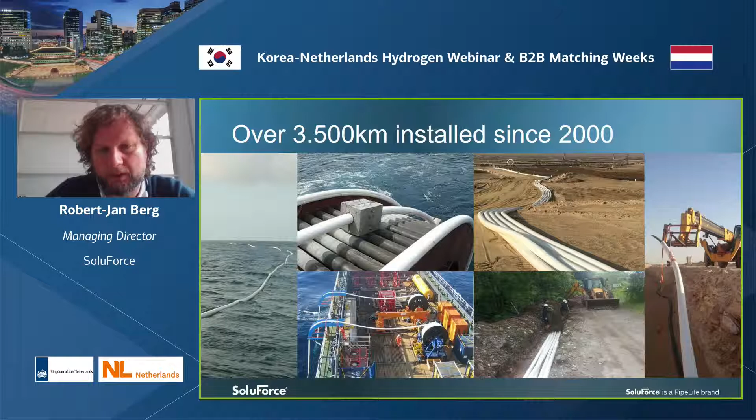What is the general idea behind it? Our product is extremely easy to install, and we can come in various locations others will not be able to reach. Then I want to bring you to the hydrogen specific applications of Soluforce. So next slide. So what did we do for hydrogen?

Just shy of 2 years ago, one of the ports in the Netherlands, Groningen Seaports, approached us with a request if we could develop for them a specific hydrogen pipeline. They had the intention to install the first backbone of hydrogen in the Netherlands, and they wanted to have a fully non-metallic product for that. So what we did, together with one of the independent third-party institutes in the Netherlands, which is called Kiwa, we did extensive testing on our pipe.

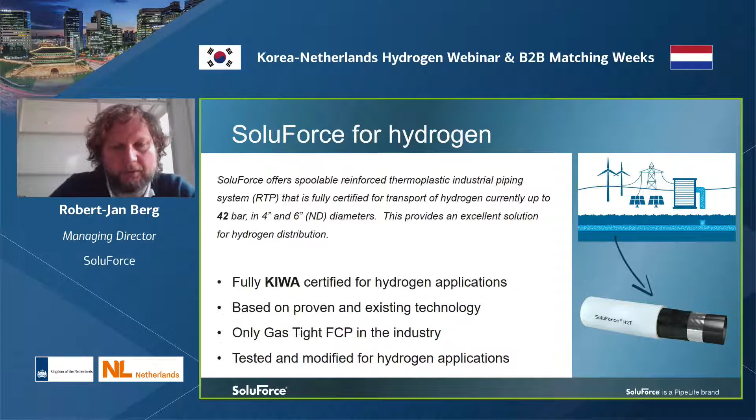It was testing of about 14 months, where we tested the permeability of our pipe, but also the compatibility of all the components of our pipe against hydrogen, which ultimately concluded after 14 months of testing that we've got a product which is unique in the world, if I may say, and that is fully tested and modified for hydrogen applications up to 100% hydrogen transport. Next slide, please.

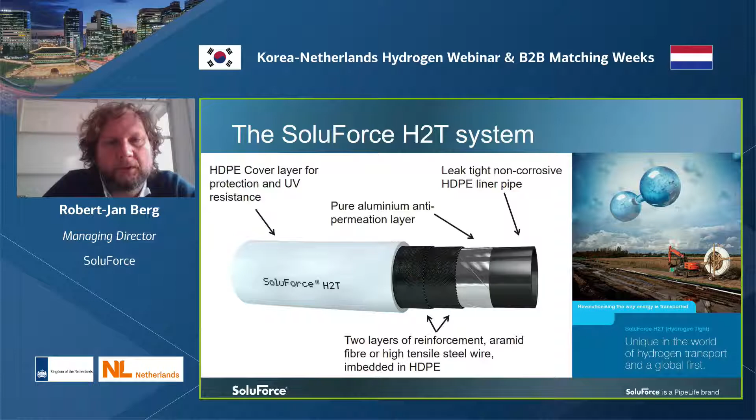How does this pipe look? The pipe consists of a leak-tight, non-corrosive PE inner liner. Then it has got an aluminium anti-permeation layer. Then it has got a 2-layer reinforcement, that is aramid reinforcement, that is being protected by our white cover of PE, which, in case you put it on the surface, has got UV resistance and makes sure that your pipe will remain at ambient temperature. Next slide, please.

Again, what are the benefits and the key elements of our pipe, the way we also want to emphasize for the hydrogen world? Our product is coming on coils of 400 meter. They are easy to transport, not only internationally, but also locally. You can see in one of the pictures, you can just use an excavator, have a very easy trailer behind it, and you can start installing our pipe. That makes it very easy and accessible to install our product everywhere.

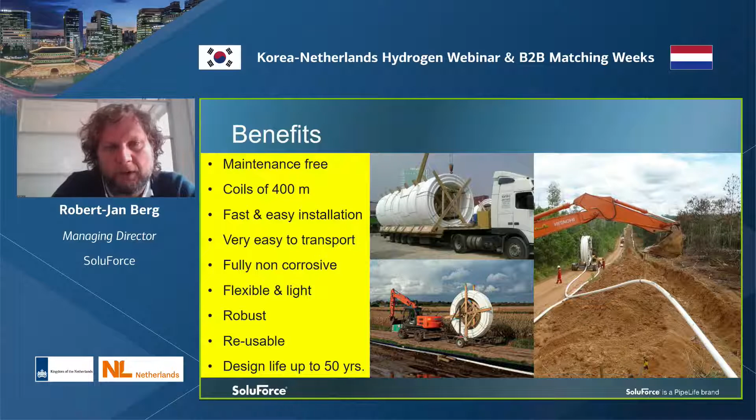What I do like to say is we are there. We have a product that can easily and readily transport hydrogen up to 100% hydrogen mix at the moment. We're looking forward to bringing our technology to every part of the world, also to Korea. And what we're looking for is, one, projects in Korea that have a request for hydrogen transport, but we also look for partners to develop our product further or potential agents to help us steer and understand the market in Korea. That was my presentation, and I thank you for listening, and 감사합니다.

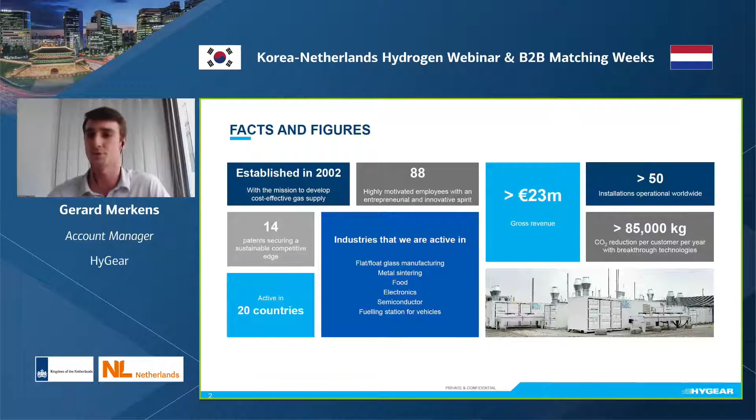Next slide, please. So what are the technologies that we have? The HyGen is our core technology. That's the steam methane reformer, which is built in a 20 or 40 foot container, which is able to produce hydrogen gas from natural gas. Apart from that, we also have the HyGen E, which is an alkaline electrolyzer, also comes in a 40 foot container.

And specifically for the glass and in the metal industry, we have developed the HyREC, which is a recovery technology that is able to capture the spent gases that they use in their process, purify them up to the required standards, and then feed it back into the process. And for other applications, we have also the HyPure, which is able to purify hydrogen gas up to higher purities.

Next slide, please. So what is our distinct advantage? In the traditional supply method, you see that you have a centralized production location for the hydrogen gas, and then the gas is compressed into trailers and transported via road transportation. And one of the benefits that you have with on-site generation is that you minimize the amount of truck movements. The systems are completely autonomous, so you also have less risk due to human interaction. And because you minimize the amount of truck movements, you also have a reduction in CO2 emissions.

Apart from that, we do, however, own our own truck operated fleet. That is so we can secure 100% supply reliability to our customers. So let's say if you have a generator on your own site, we would also include a tube trailer supply to really secure that 100% supply. Next slide, please.

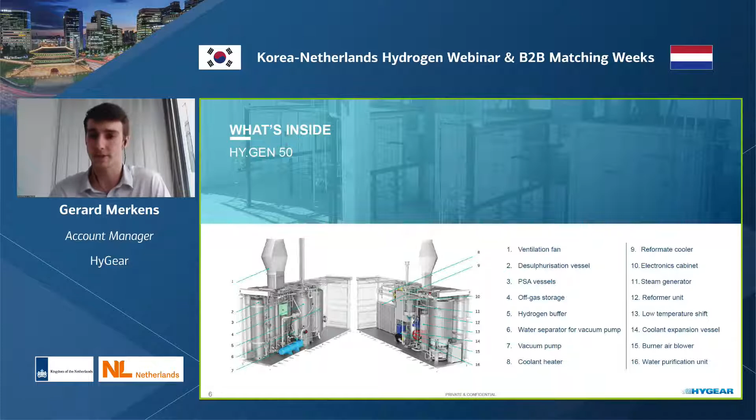Additional equipment to compress and store the gas is not included in the system, so that will be outside of the container. But everything regarding the production and purification is included. Next slide, please. And we have three models available. So the HyGen 50, able to produce 50 or 47 normal cubes an hour. That is roughly 100 kilograms a day. The HyGen 100, which is roughly 94 normal cubes an hour, able to produce 200 kilograms a day. And the HyGen 150, which is able to produce roughly 300 kilograms per day.

And nowadays, we indeed see the increased demand for fueling stations. So it's ideal to have one or two systems. You can combine them. You can install them in cascade to secure that supply for the fueling stations. One main advantage of these small-scale on-site generators is the flexibility. Whereas normally you cannot scale down the systems too much because it will cause wear and tear and stress on your materials, on your metals inside the system, our system can really scale down to 10% of its maximum output.

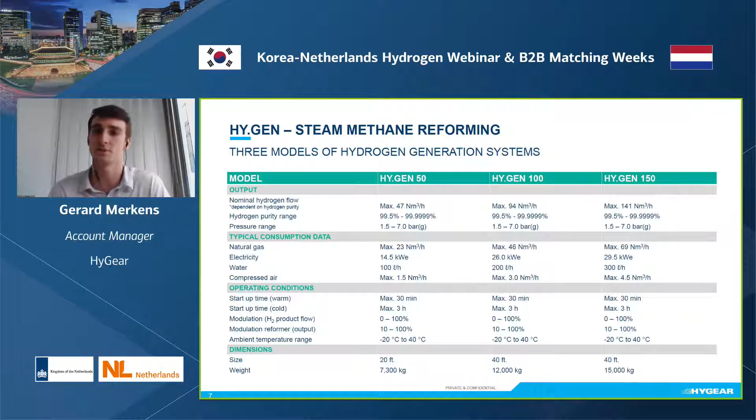So for example, for fueling stations, of course, you don't have a constant flow or a constant demand. So the system can actually read what the demand is and scale its production to the requirements. Next slide, please. So as mentioned, we have our first reference in South Korea. There, the hydrogen gas that is produced will be used for the stationary power generation, but also for fuel cell vehicles.

Next slide, please. So I'll just go through some of the references. If the time is up, please, we'll go to the next speaker.

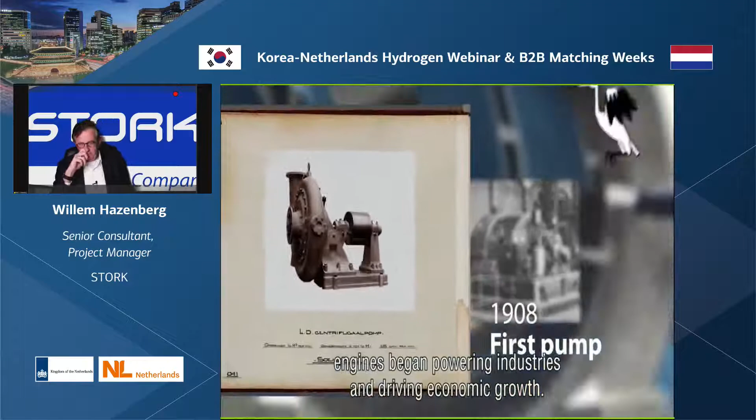Stork's products received top recognition. We won gold for our horizontal compound steam engine at the 1878 World Expo in Paris. And we were certainly in good company. Along with product innovations came social innovation. Stork cared about the well-being of its people, recognizing that they were key to success and believed in sharing prosperity.

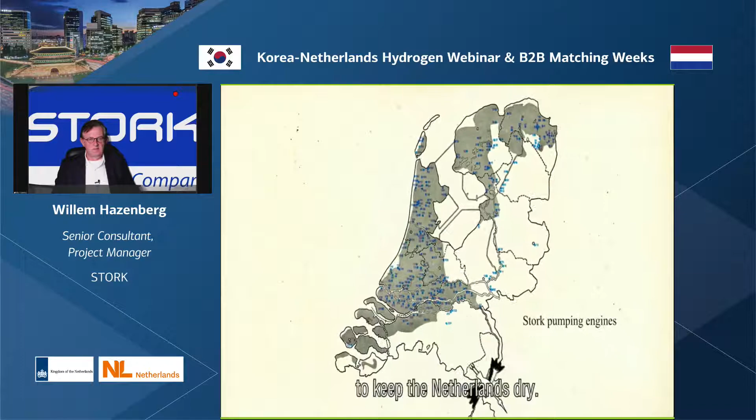As our products spread throughout the world, our company also grew, spreading its wings to the Far East and the Far West. Stork colleagues began traveling widely to support their products. The products of Stork directly impacted countries and communities. By the 1950s, more than 200 pumping stations were powered by Stork engines and pumps to keep the Netherlands dry. Some are still in use today. The world's most powerful diesel marine engines were built by us in 1975.

After years of engineering and collaborating with industry peers, as we continued to grow and diversify, we acquired companies with specialty expertise, merged with others, and took on joint projects. In 2007, with a workforce of more than 8,000, we shifted our focus to industrial maintenance services, while keeping select fabrication capability. Within 10 years, our workforce had more than doubled. First adding businesses from South America to Australia, and then joining Fluor. We are now 18,000 people strong.

Stork is its people. We are one team, working together, connecting and engaging, and sharing expertise around the world. We work under challenging conditions, with high-pressure equipment and in tight situations. Therefore, safety is at the heart of everything we do, and has been for more than a century. Backed by the right training, the right preparation, and the right mindset, we make our solutions work for our clients and value the communities in which we work.

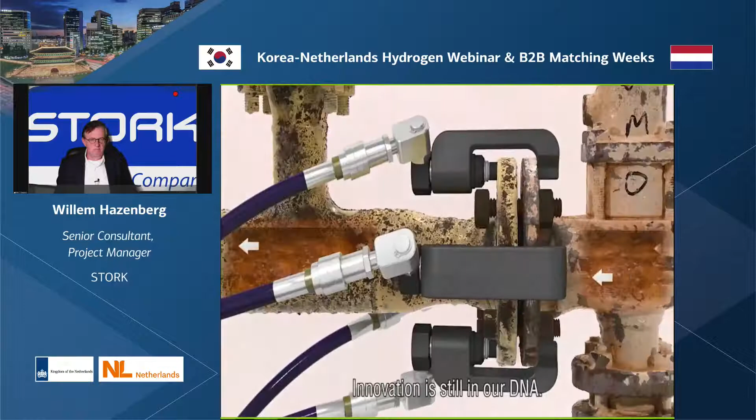Innovation is still in our DNA. We drive new technology solutions and will always look for a better way. Stork is taking on the challenge for the next 150 years.

Next slide. This was one of our latest big projects in Holland. This was a project for Shell NAM. It's about a 700 million project. This was the entire erection of this site. Also, yesterday we got the award for 3 years maintenance for Shell Esso for this site.

But what we are seeing is this old world will disappear, the oil and gas world. This was our core business. That was the reason that we said, okay, we go for the new energy, the energy transition. That's where we came from. Next slide, please. Our ambition is to be the industry reference in the field of hydrogen for consultancy, engineering, and project management.

Next slide, please. What we did, we started an organization, we call it HydroGreen. We all talked about hydrogen, but we didn't see projects. So we really started to build value chains. That started with 22 people. At this moment it is more than 500 people, 180 organizations involved. Stork is leading this group as chairman. Next slide. Stork is seen in the industry as part of the hydrogen community. You see our presentations at the World Forum in Germany and now in Korea.

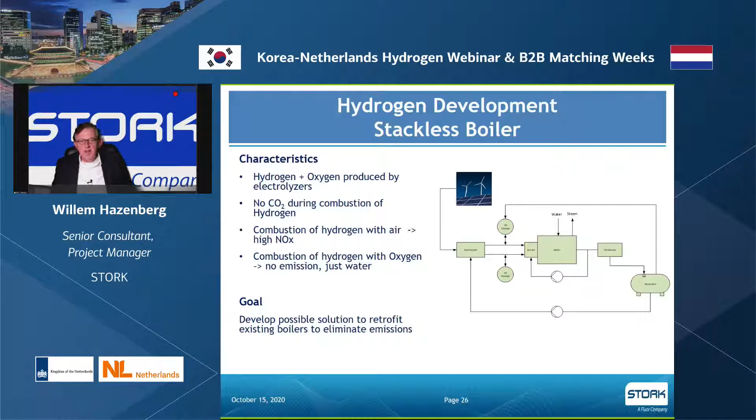Another project that we are doing in Stork: we have a lot of boilers in the company. We developed a boiler on hydrogen, but also on hydrogen and oxygen. This means we can go up to 3,000 degrees, and we develop it in the Netherlands in our Hengelo area. Next slide, please.

Another project that we are working on, and I see the lady is also involved online, is a zero emission power box solution. This is a container that we can put behind the train, and we will power the train that way. And we're also looking at this solution now for other applications where we need zero emission solutions. Next one.

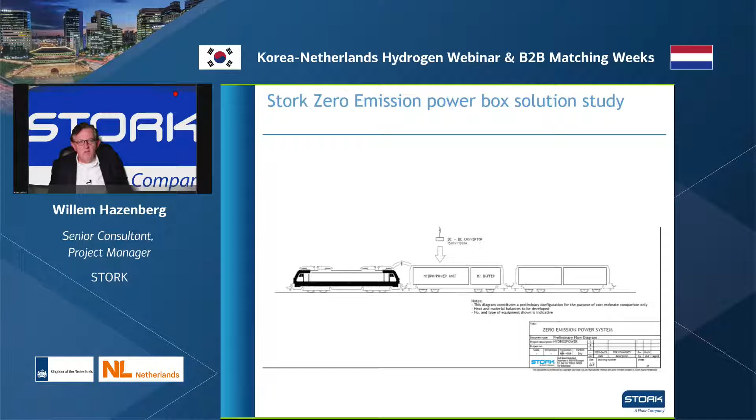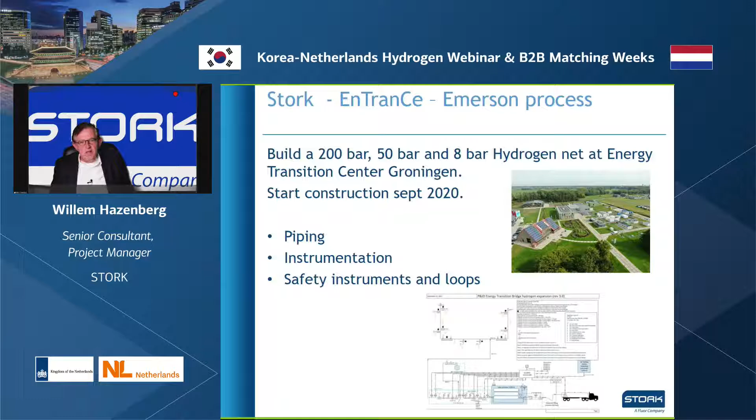Another project that's starting this month is on the EnTranCe site. This is the education site for applied engineering. There we will build a 200 bar, 50 bar, 8 bar hydrogen network. And in January, we will start building a 1 megawatt test center there. Next slide, please.

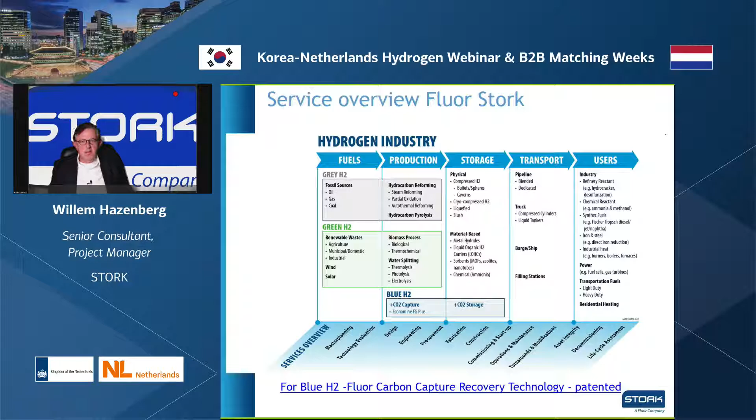I think I make it in time. One of the most important things in our company is safety, and safety I think is even more important in hydrogen. Nothing will kill hydrogen more than a safety incident. Also in our core business, coming from our oil and gas background, safety is always first.

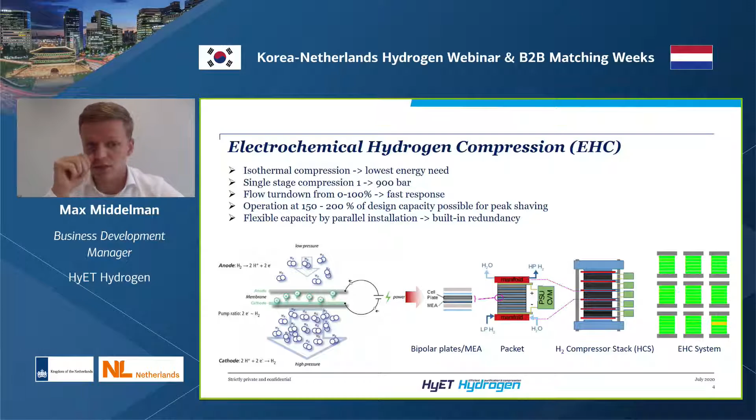So if you compare it to regular mechanical compressors, you see a lot of differences. The first is obviously the maintenance. Usually the mechanical compressors have all these moving parts, and the compressors are initially not really built for hydrogen itself, which eventually causes them to break down quite easily. We don't have that. Our materials and our technology are especially developed for hydrogen, and therefore we can assure the same lifetimes as fuel cells or electrolyzers have. But we don't have any oxygen, so we don't have the risks of that.

Because we have a scalable solution, we can switch out the cells or stacks if we need to. We can monitor each cell from a distance. So if we see that one cell or one stack is ready for replacement, we can just switch it off while the rest of the system is running. So therefore we can assure an availability of the compression system of 99% or more.

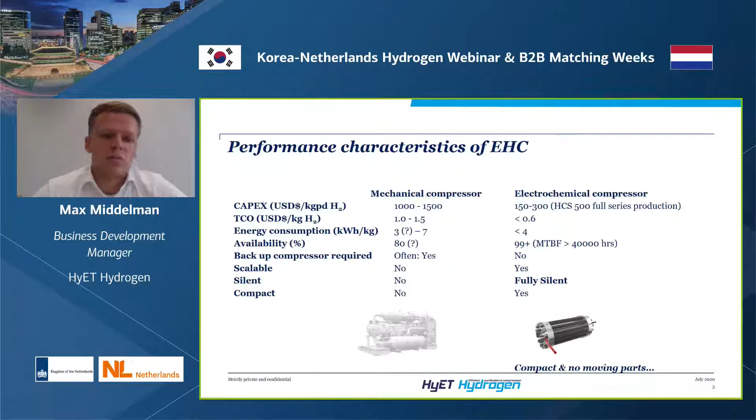We have a relatively low energy consumption. As I explained earlier, it's an isothermal compression system, which only uses the energy to compress and not to move. So you don't really have heat that occurs. And therefore, eventually your TCO, your total cost of ownership of the compressor, is really low in terms of dollars per kilogram of hydrogen that you compress. Next slide, please.

So over the years, we've done a lot of developments. At first, in 2010, we started with a single cell system, which could compress really small amounts of hydrogen to high pressures. We went to bigger stacks with more cells, and what we are at right now is scaling up our HCS 100, which is 100 square centimeters per cell, up to the HCS 500, which is the next stack configuration, which can do 50 kilograms a day per stack of compression.

And if we make this in a modular system, you can scale up your compression capacity to whatever size you need. That also lowers the total price of your system to prices around 300 to 500 euros per kilogram per day for your compression, and that's a good price for compression, and lower than the regular mechanical compressors, especially in the smaller quantities. Next slide, please.

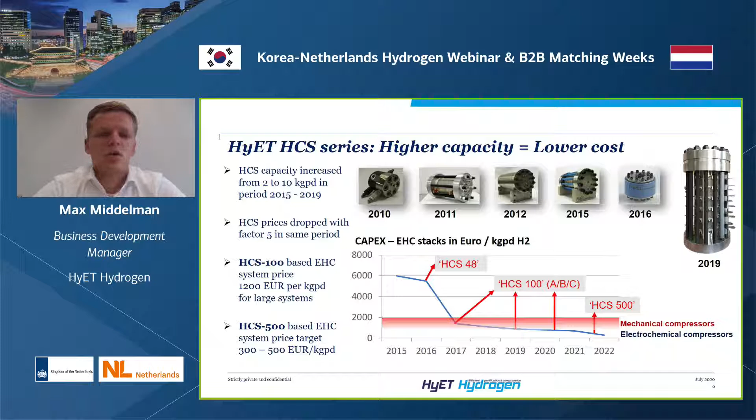So over the years, we have done some projects. At first, we started with a small cabinet to refuel drones in the US, where we did 2 kilograms a day. It's a portable system that's still running there. We also did some 10 kilogram a day cabinets for higher pressures, so to refuel cars, for instance, at 875 bars. The container you see in the middle is the one that we used in a project with HyGear as well, for the hydrogen refueling station.

It was a container that did 120 kilograms a day for the refueling station at their site, and we're at the moment scaling it up to bigger capacities with the HCS 500. On the right side, you see the stack-in-a-box concept for the larger containerized systems, where you see the box, which contains one stack with its own power supply, nitrogen blanket, and all the equipment that's needed, and the rest is the balance of system. So we can generally scale up the system per box. And this can scale up till 2,000 kilograms a day, or whatever is needed.

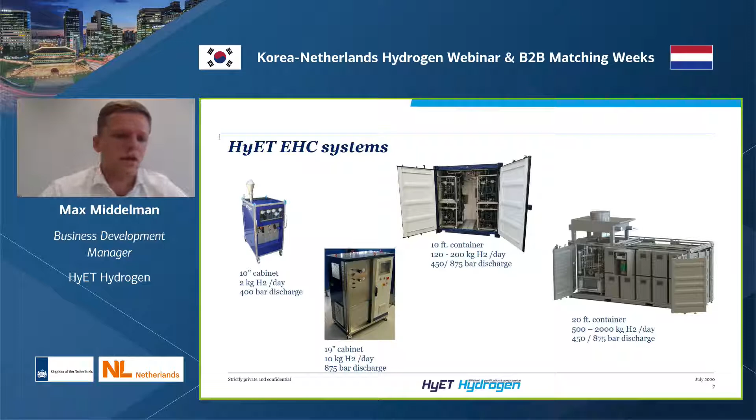Next slide, please. So this is what I explained earlier, the scale up of the system, where we did actually 0.01 kilograms a day at the first R&D instrument, and where we go to systems of 2,000 kilograms a day next year, and even bigger are requested at the moment.

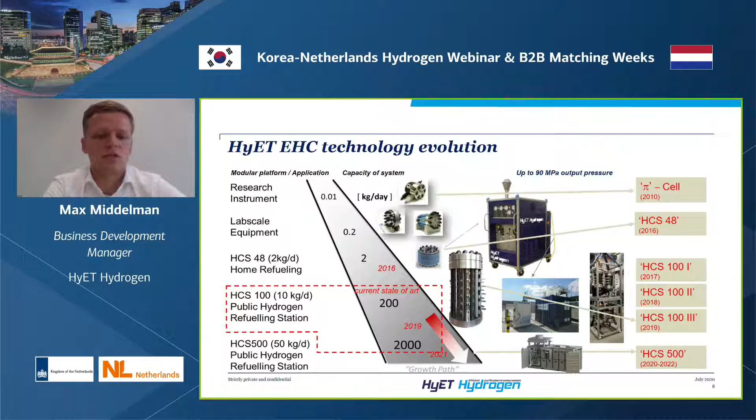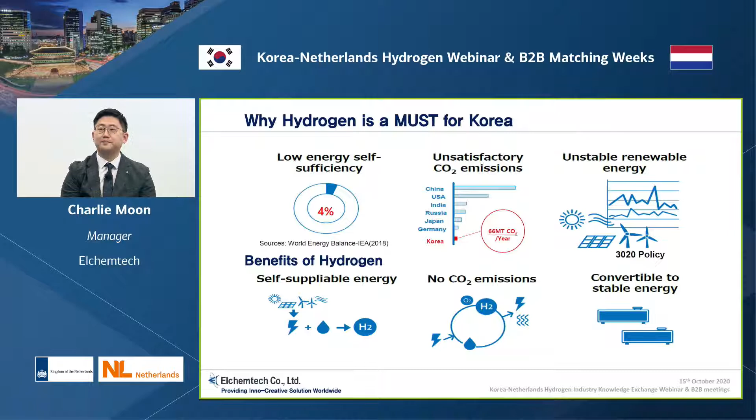I want to talk to you about the government policies that have been released. It started with the 30-20 policy, which is to have 20% of power generation from renewable energy by 2030. Then it was transferred to the hydrogen economy roadmap. Here you'll be able to see the amount of hydrogen they want to produce, the price, or which kind of methods they'll be using to produce hydrogen. The reason I added some additional information regarding electrolyzers is because now the Korean government is focusing on producing hydrogen using SMR methods, but eventually it will transfer to green hydrogen using electrolyzers.

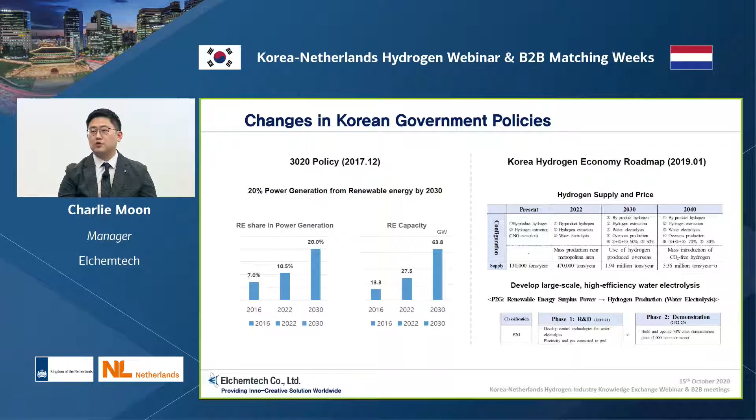The biggest target for green energy is that not only are they trying to improve the amount of renewable energy generation, but they're also trying to build hydrogen cities. Three cities are already released, and the extra cities will be chosen later on. But altogether, they'll have 6 cities in Korea to do with using just hydrogen or maximizing hydrogen production.

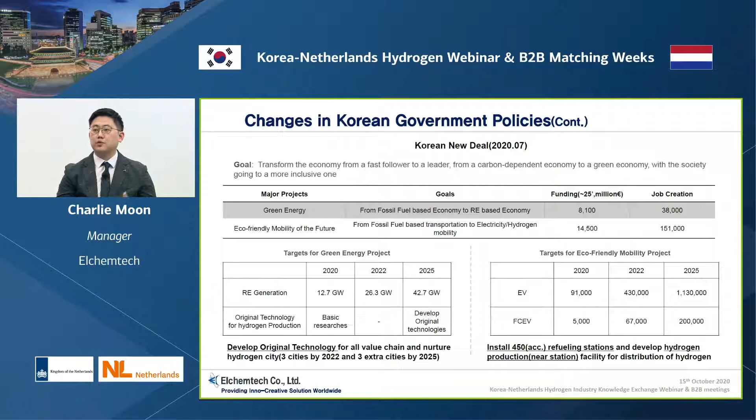For the eco-friendly mobility projects, I'm sure that you guys have seen this number a lot. It's based on the overall cars there, especially fuel cell vehicles. The Korean government wants to reach around 200,000 FCEVs by 2025. And not only that, they want to build a cumulative number of up to 450 refueling stations. And they also want to have hydrogen production near stations. They didn't really emphasize on-site hydrogen generation, but we expect it will be somewhere very close by to produce hydrogen.

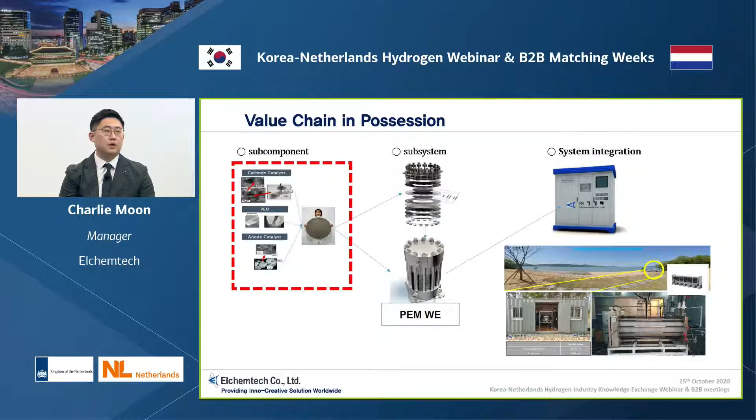And I want to talk about Elchemtech and what we're doing at the moment. Elchemtech's been around since 2002, and we've been focusing on developing PEM water electrolyzers since 2003. Elchemtech is the only company in Korea to provide megawatt scale PEM electrolyzers at the moment. And we have a very strong value chain, from the catalyst to the MEAs to the electrolyzers and the systems. In the pictures there is our 0.5 megawatt stack, in operation at the moment at one of our demo sites.

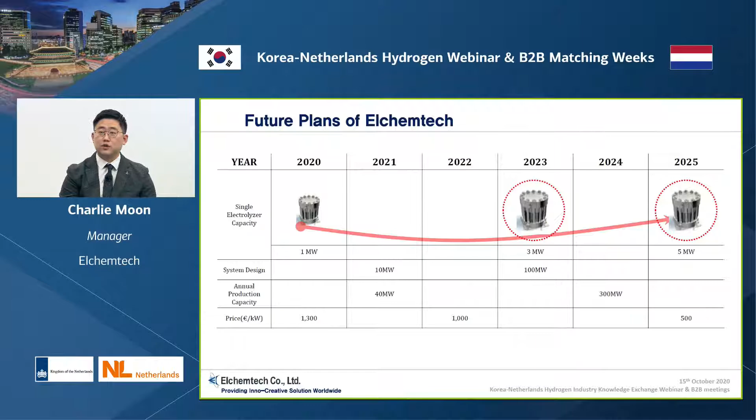And this is our roadmap of how we want to develop our electrolyzer. At the moment, we're at the scale of 1 megawatt, but by 2025, we want to have a 5 megawatt electrolyzer, and we want to have the system stacks integrated up to 100 megawatts. We're hoping to increase our annual production by 300 megawatts by 2024. And if mass production goes on, we're hoping to reduce the price of the electrolyzer to 500 euros per kilowatt.